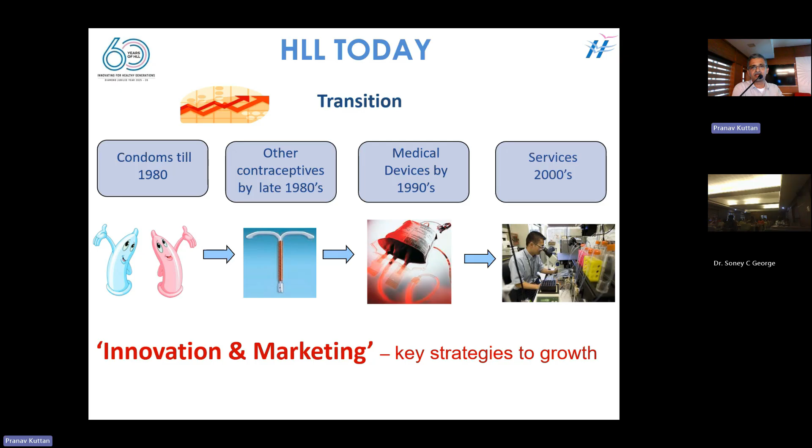As a business overview, we are into three different segments: contraceptives, pharma and FMCG. We produce condoms, intrauterine devices, oral contraceptive pills, hormonal pills, and personal hygiene products, which include sanitary napkins. Hospital products, which includes blood bags, surgical sutures, disinfectants, and rapid test kits for various infections. And healthcare services, we have the umbrella of Hind Labs, which is a pathology lab, seated in different parts of the country for providing testing of all parameters at affordable rates.

We also have Hind Labs imaging services in different hospitals, including medical colleges. In Kottayam Medical College also we have one. We provide MRI and CT services at affordable rates compared to the market. And Amrit Free Generic Pharmacy is the HLL brand under the ministry for providing pharmaceutical products and implants at affordable rates for the population.

So, in a nutshell, this is the range of products manufactured and marketed by HLL. These are some of the brand names: Moods, Velvet, Emily, Saheli, Novex, Happy Days, etc.

Let me come to talk today about latex technology, which we have been utilizing for production of condoms since the 60s. Initially, we got the technology for manufacturing condoms from latex from a company called Okamoto in Japan. We started as a factory for packing condoms, which was produced and imported from Japan, and later we started our own manufacturing using the technology.

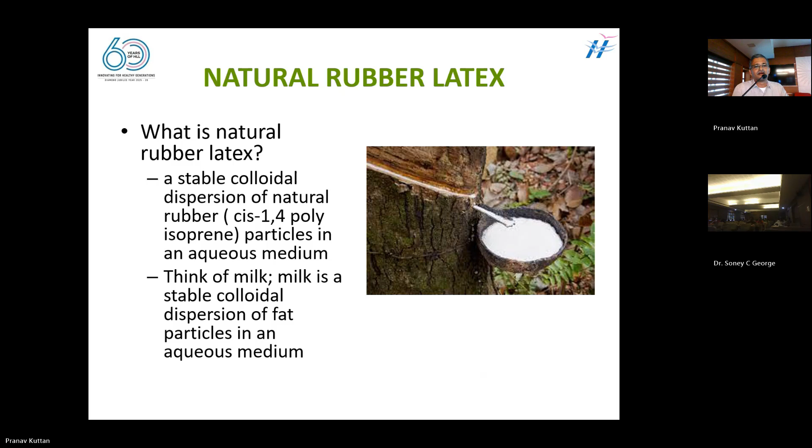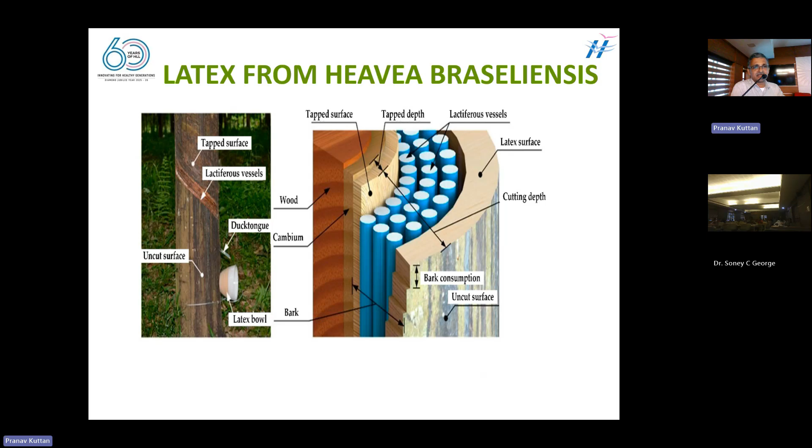So where does this latex come from? It is produced from a plant called the rubber tree, Hevea brasiliensis, which was initially brought from Brazil, also called para rubber. It came to Kerala through Ceylon and to the tropical countries. This is the juice of the plant, a weeping from the vessels, the lactiferous vessels. It is tapped at frequent intervals to obtain it from the tree as an aqueous colloidal solution, which is sticky in nature and has unique properties of elasticity.

So this consists of small spherical particles surrounded by a protective shell of proteins. It has a distribution of particle sizes, from small to big, typically around 1 micrometer. The size plays a very important role in its surface effects. And the chemical structure is shown here. This is the molecule isoprene, and this is joined together to form the rubber polyisoprene.

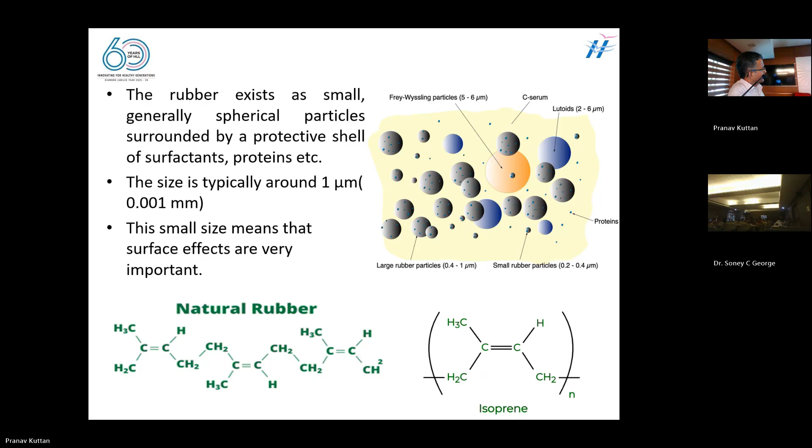So for comparison, in 1 teaspoonful of natural latex there is approximately 3 grams of rubber. You know that the total weight is much more than that; the remaining weight is water. At a particle diameter of 1 micrometer, this means it contains approximately 6 × 10¹² particles of rubber in the spoonful of latex. The total surface area of the particles is approximately 20 square meters.

So this small volume has a much bigger area. The smaller the size, the more the area. If it is stretched lengthwise, it would stretch over 6,000 kilometers. That is the length of the chain.

So how would a latex particle look? It's a spherical shape, as I told. It has a covering of protein over each particle. Inside the particle are the polyisoprene molecules, and there are other materials called phospholipids, which help the particle keep its shape and stability. It has a negative charge, and it is stabilized by the electrostatic repulsion of these particles.

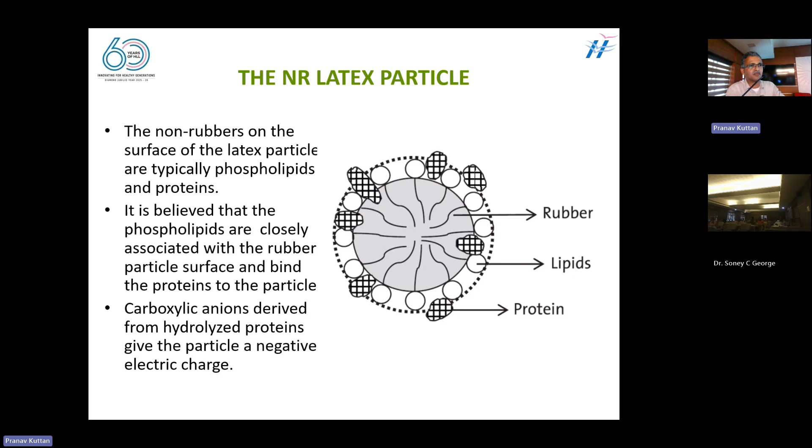So what is the structure telling us? The high molecular weight means that the chains in the small area will entangle as a network structure, like pasta noodles forming a chain entanglement structure. So it gives a measure of elasticity to the molecule. As you might have seen from your school days, these rubber bands are elastic.

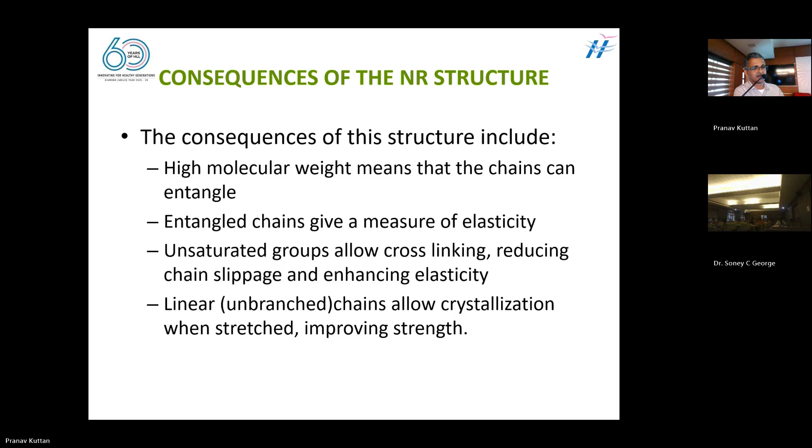The elasticity is given by a process called vulcanization, in which the chains are cross-linked using some molecules, especially sulfur. So when you use this latex, as I told, it contains rubber particles and much of it is water. Why does this latex need to be concentrated before use?

When you use this latex as such for a product, it is quite uneconomical because it contains only 30-35% rubber. The remaining 60+% is water and other particles, including proteins, carbohydrates, lipids, carotenoids, etc. So there are ways to concentrate this latex before using it to produce a particular material. These methods are not done in our household latex production; the latex is sent to a collection center where it is converted into a product.

So these methods are, one is centrifuging. You are all familiar with centrifuging. When you rotate the liquid at a higher speed, the solid particles will settle, and this can be used to separate the water from the isoprene molecules. Next one is creaming. You have seen creaming in household activities, for producing cake and all that. The cream contains the material we want, and the remaining things settle out. So creaming also can separate the rubber from the water.

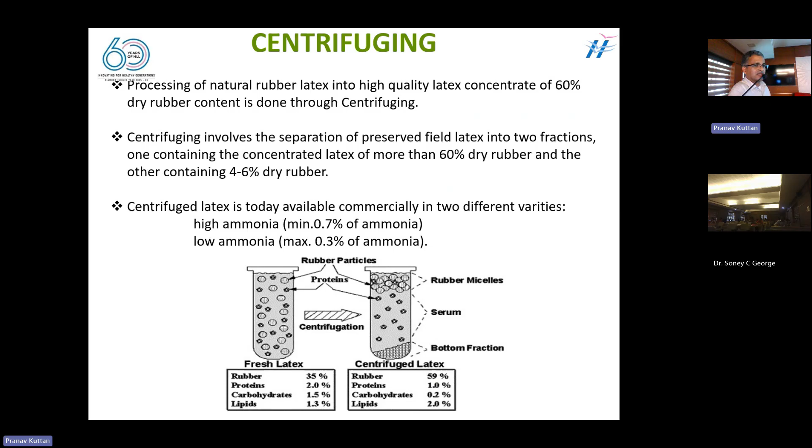The next process, as I told, is creaming. This is a simple process which is used in normal household activities or small scale industries, for rubber bands or small products, and is done using a creaming agent. This creaming agent is normally tamarind seed powder, which is used to separate the rubber latex from the water.

So the cream layer, which rises to the top, contains the major amount of latex, also around 60%, and the bottom level, the serum level, is considered as an effluent which can be removed from the mixture. Here, an extremely concentrated 60% may not be obtained. They may obtain 50% only, because this much concentration is required for products which are not so critical in terms of rubber, like rubber bands or finger cots or balloons, etc.

Now, coagulation. When you see the product from latex, you see a solid material. You are not seeing a liquid material. So these rubber particles are coagulated to form the dry rubber material. As I told, this protein membrane is covering the rubber particles. This membrane is negatively charged and they repel. When you add acid, these negative charges get neutralized, and then latex particles join together to coagulate. And by the action of bacteria also, this will happen. So when you keep the rubber for a long time, normally it will get coagulated without adding any acid.

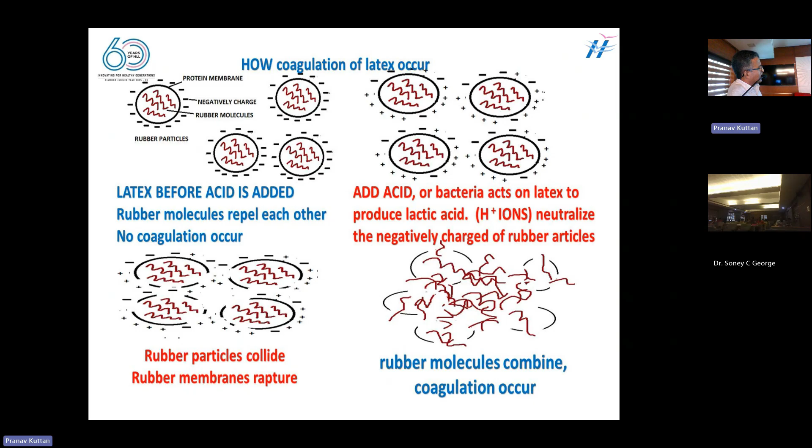So when you see the neutralized rubber particles, positive ions are there, which will neutralize the negative charge. It will break the membrane, and the particles will collide, and this will form an entangled structure, which is the rubber hydrocarbon. And this will be a stage called a pre-vulcanized stage, or a coagulated stage.

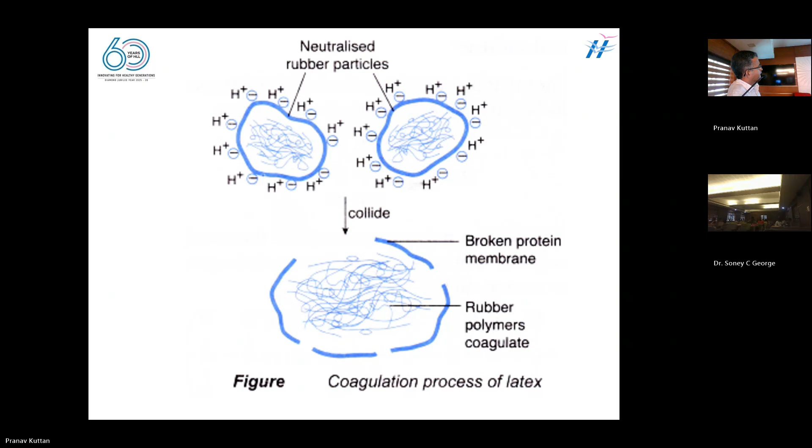So in the rubber latex, you have seen water is there, rubber hydrocarbon is there. There are other materials which are also responsible for giving stability to the latex. As I told, latex is a colloidal material. It is colloid particles dispersed in the water medium. So these colloids are stabilized without being coagulated or destabilized by the effect of other materials like proteins, carbohydrates, lipids, and enzymes, which have specific importance in giving properties to this latex.

Some support bacterial growth, increase volatile fatty acids, and decrease latex stability, and some are acting as fillers. Some are acting as components for increasing its modulus, increasing its strength. So all these properties are given by these additional non-rubber components.

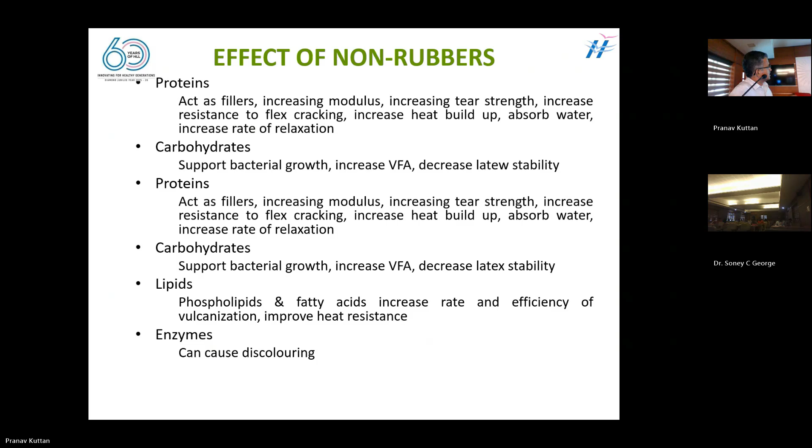So why can't we use this rubber as such, as we get it from the tree or after concentration? As you all know, when you see uncrosslinked rubber, or rubber obtained from the tree which has been coagulated, it will have elasticity, but it's not so stable. It will rupture, or it is not stable at high temperature. It will melt.

So in order to improve the properties, latex, or rubber, is subjected to a process called vulcanization. All of us studied this in our school classes. It is the addition of sulfur. The name comes from Vulcan, the god of fire. This is used to give linking between the hydrocarbons, which I have shown just now. These hydrocarbons, which are entangled in the rubber molecules, are cross-linked, held to each other with the help of sulfur atoms.

This process is called vulcanization, and it makes the rubber stiffer and more elastic. It helps to retain its elasticity. When you stretch a rubber band, you can see it coming back to its state because of this strengthening effect. So it's vulcanized rubber. When you have rubber gloves, you can stretch them, wear them on your hand, and they will retain their shape, because the elasticity is retained. That's the importance of vulcanization in using rubber for its end use applications.

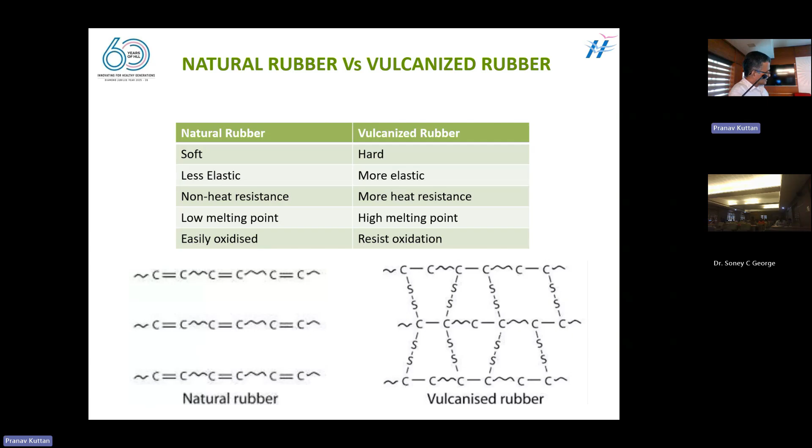So that's attacked. Oxidation happens easily, and it will break. It will not have the strength itself. So for imparting strength, this process is used in different industries. As I told, rubber has elasticity. It's an elastomer.

An elastomer can be made by linking together the polymer molecules to form a 3D network, having a network in each direction. The chemical bonds between the polymer molecules are called crosslinks. These are formed by sulfur, and sulfur cures the natural rubber. This is the process of vulcanization.

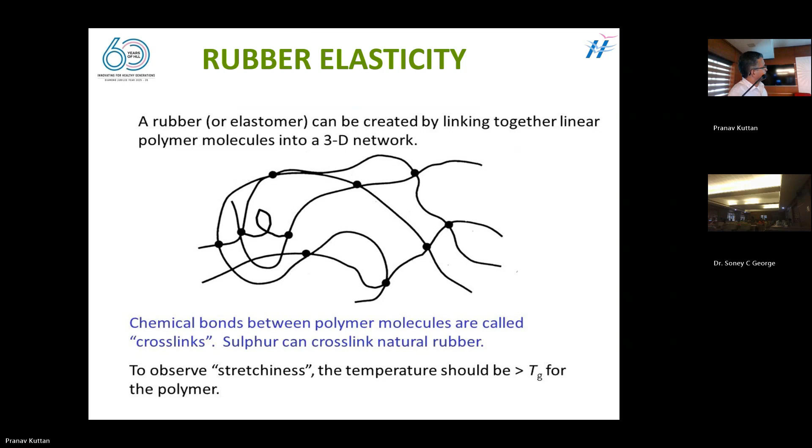So in order to do the compounding of latex, we use several agents to impart the properties. We have to add sulfur to make the cross links between the carbon chains. So for that we require sulfur. This is a major vulcanizing agent which is used for natural rubber latex.

Natural rubber latex can also be vulcanized without sulfur. They can be vulcanized by other processes called radiation or peroxide vulcanization. There are also other methods. But the common commercially used method for imparting elasticity and strengthening rubber is sulfur as the vulcanizing agent.

So when you use sulfur alone, this is going to happen over several days. When you mix sulfur and keep it in the vessel, it will take days to get the cross-links. When you heat it, it will also take hours for the cross-links to happen. So this is not commercially viable. To make it commercially viable, you want to speed it up. You have to cross-link it in minimum time, but obtaining maximum properties.

For this purpose, we use some other chemicals which can accelerate this process. These chemicals are called accelerators. These are chemicals having several functional groups, which are either sulfur donors or activators, which initiate the reaction of sulfur with the carbon.

So, as I told, these rubber products which we are using have to have a shelf life. When you use gloves, they have to stay on the shelf for a year or two. When you use a rubber tire, it has to stay on the shelf and also with the car or bus for a number of kilometers or years. So for this, it has to have an ageing resistant or ozone resistant property, which is imparted by adding other chemical agents called antioxidants.

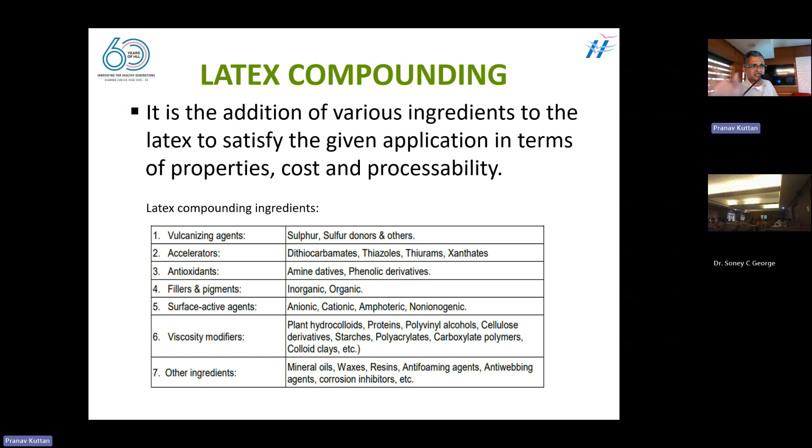So these are the properties of the materials which you are adding: vulcanizing agents, which introduce the three-dimensional network; accelerators, for speeding up the reaction; and antioxidants, which prevent oxidation. Fillers give colors. Surface active agents help the system work much better in the later stage. And viscosity modifiers keep the viscosity at a level which is good for the product to be formed.

So when we take this latex from the centrifuging plant to a manufacturing site for a rubber product, like latex gloves, condoms, finger caps, tissue expanders, or baby teats, anything, you want to have the optimum properties for the product to be formed. As I told, this is a polymer molecule having a particle size or variation of particle size in the latex, which gives specific properties to the final product.

So when it is kept in an idle state for a period of time, it undergoes a step called maturation. What happens in maturation is that the crosslinks get adjusted. The mono, di, or polysulfidic linkages get adjusted as we require for our products. We design the crosslinks to obtain the properties our products require. So we keep the latex for a maturation period, normally a few days.

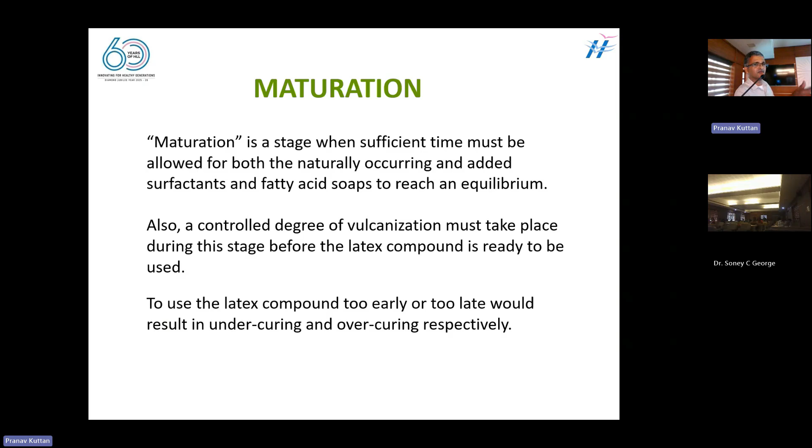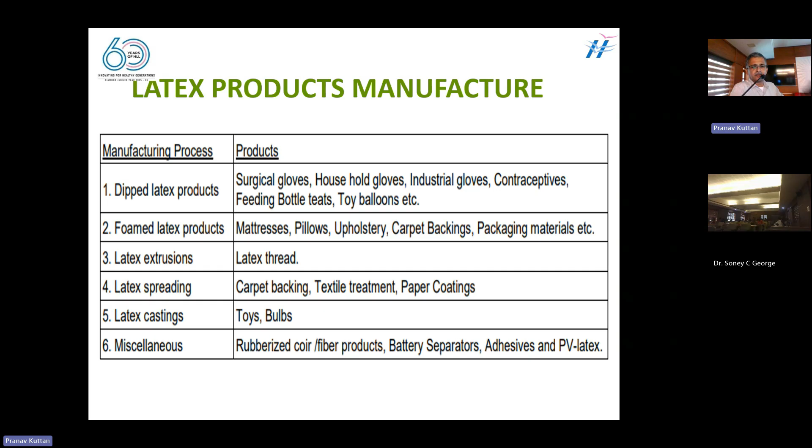So there are a lot of products made from latex which you might have come across in your daily life. These are dipped products, which include gloves, industrial gloves, contraceptives, feeding bottle teats, toy balloons. Foam latex products, the beds you use, the seats you sit on; latex extrusions, the latex threads which are used in our garments; latex spreading; carpet backing, which is used in households; coatings for paper; latex castings, certain toys and bulbs; and rubberized coir products, separators, adhesives, pads, etc. are also being used.

So, what are the processes by which you make use of this latex for making the products I have already mentioned? There are different methods by which this can be converted to a product. For example, when you get a jar of latex and want to convert it to a rubber band, how will you make it? You want to convert it into gloves, how will you make it? A flower? A bed? These are by different processes. So the products we see, the KSRTC seats you are sitting on, the beds you are lying on, or the rubber bands you are using, are all subjected to different processes converting this latex into that product.

So one of the processes is called dipping. It's a simple process: dipping of a mold into the latex, which will form the shape of that mold, and which is dried in an oven for some time for the process of vulcanization, and then you can use it after taking it from that. The simplest example is gloves. A glove mold made of porcelain or glass, you can put it into latex. When taken out, it forms a layer of latex over the mold. Then you can dry it in the oven at a specific temperature for a specific time, which can be predetermined.

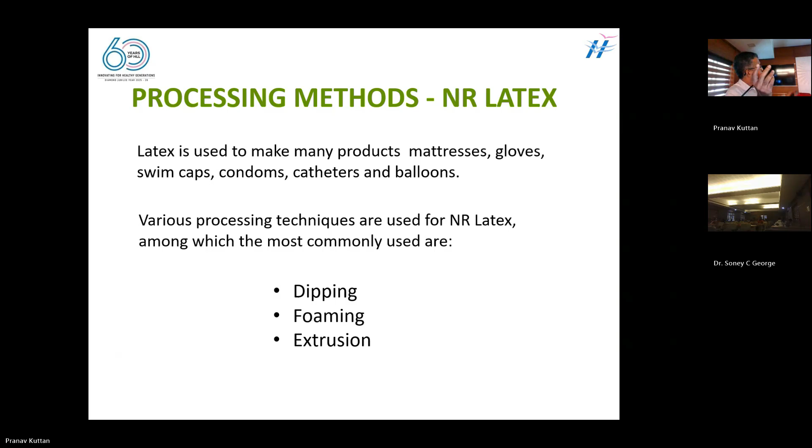These are the examples. As I told, dipping is the most widely used process for products made of latex. This is the balloon and the gloves: the former, which is a porcelain former, a wood former or a glass former, is inserted into the concentrated latex, which is mixed with ingredients like sulfur, antioxidants, acids, accelerators, etc. And of course, color. Then this is withdrawn from the latex and kept for drying in the oven at a specific temperature, maybe 70, 80 or 100 degrees Celsius, for a specific period of time, which will give the final product. And this can be taken out from the mold. The stripping is happening.

So when you dip, as I told, this is simple dipping for making balloons or gloves. There are different types of dipping depending upon the thickness or the type of material you require. For example, for baby teats, you want pure rubber because babies put them in their mouth. So you don't want any other chemicals there. So you use the most pure form of latex, having no color or a mild color, with no residual accelerators, residual antioxidants or residual chemicals, so as to prevent the baby from getting affected. There is no coagulant. I'll come to the first one.

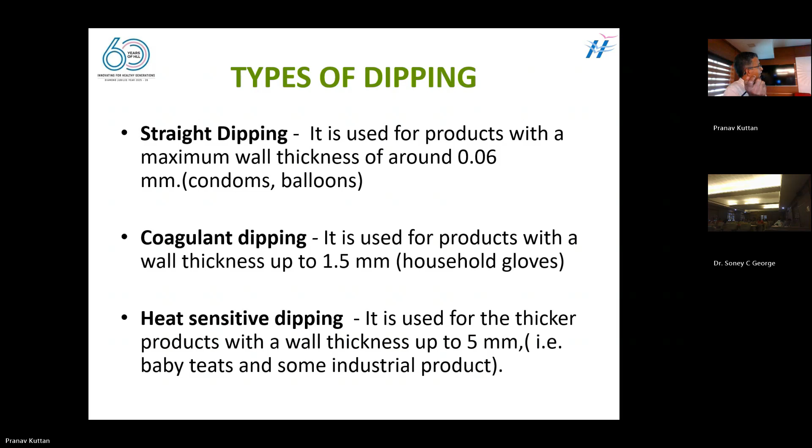The simple dipping method is used for making condoms. Condoms are contraceptive materials used by male and female. It's a barrier contraceptive used for preventing conception and also to prevent sexually transmitted infections. This is made by a simple, straight dipping process.

This is tested for production, freedom from pinholes, required bursting volume and bursting pressure, elasticity, strength, modulus, heat resistance, shelf life, etc. It can be made in different sizes, shapes, textures, and flavors as required.

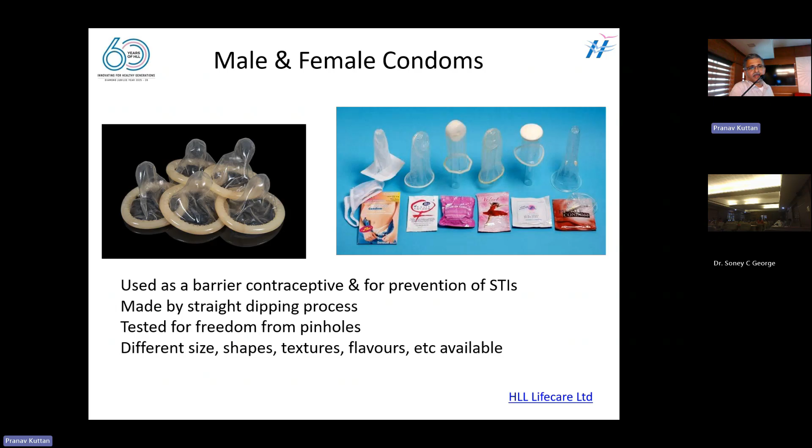The second product made using straight dipping is surgical gloves. Gloves are produced from different polymers, not only from latex. There are people who are allergic to latex, so they use latex-free gloves made of polyvinyl, nitrile, or other polyurethane materials. So different types are available.

These are made using latex by dipping porcelain molds. The porcelain mold is dipped in the latex for a particular time, then taken out and dried. It is dipped again in the latex to get sufficient thickness for the material.

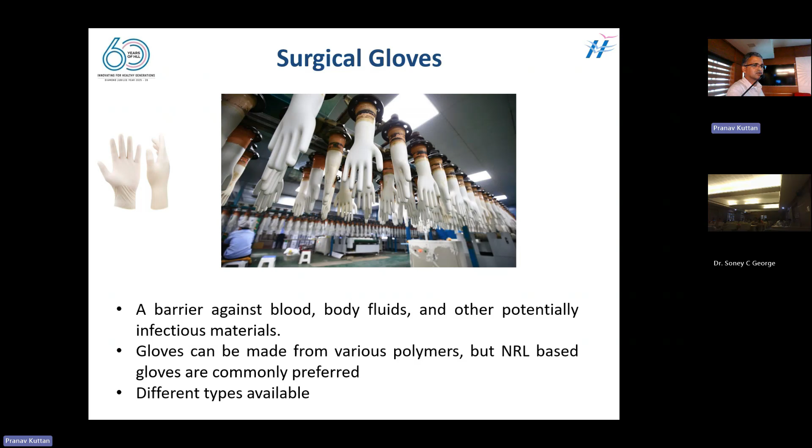Another product you come across in hospitals is the urinary catheter, also known as Foley's catheter, which is an indwelling catheter used when you're in a surgical situation or hospital stay and cannot go out or urinate yourself. The doctors insert this into your urinary bladder to drain the urine once it is formed, without the patient going out for urination.

This is used for a couple of days or weeks, as long as the patient is in the bed. This is the Foley's catheter, and it has a balloon. This portion is inserted into the urine bladder, while the balloon ensures the urine is drained off outside. These are called indwelling catheters.

Then there are external catheters, called condom catheters, worn by male patients who are bedridden, including old patients who cannot go outside frequently without help to the urinals, and they use this material. These are all intermittent catheters, short catheters which can be used by the patients.

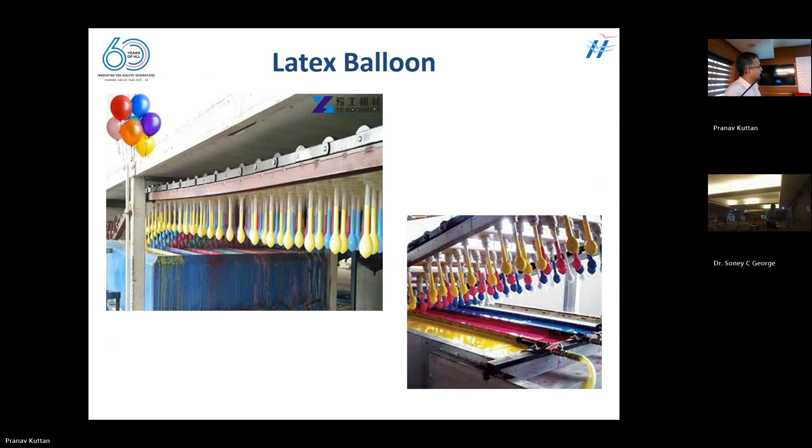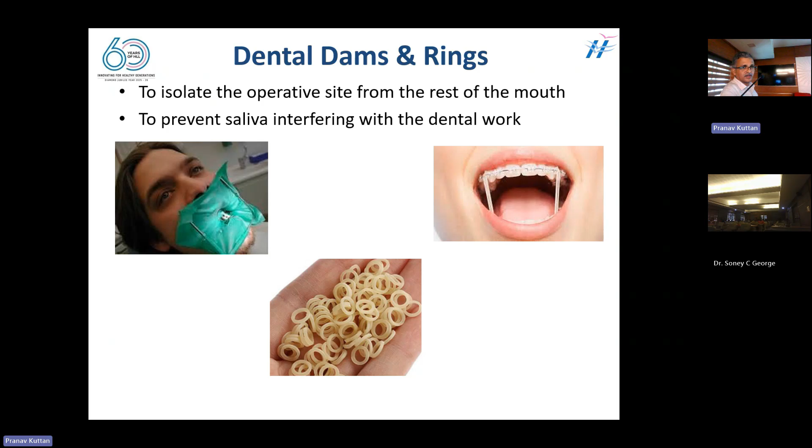So these are after the dipping process. The next one is the foaming. The foaming of latex is done for making cushioned materials like beds or pillows, made from latex using some foaming agents which can generate bubbles, allowing air to escape so the foam can be formed, then a gelling agent for gelling the material, and then a curing agent to cure it in the oven.

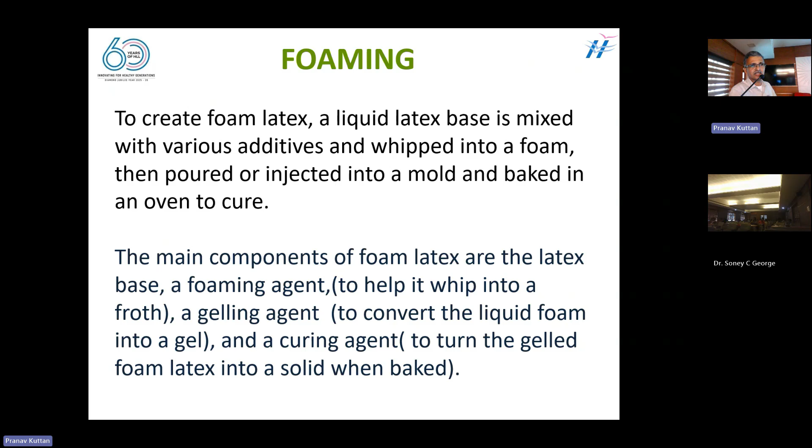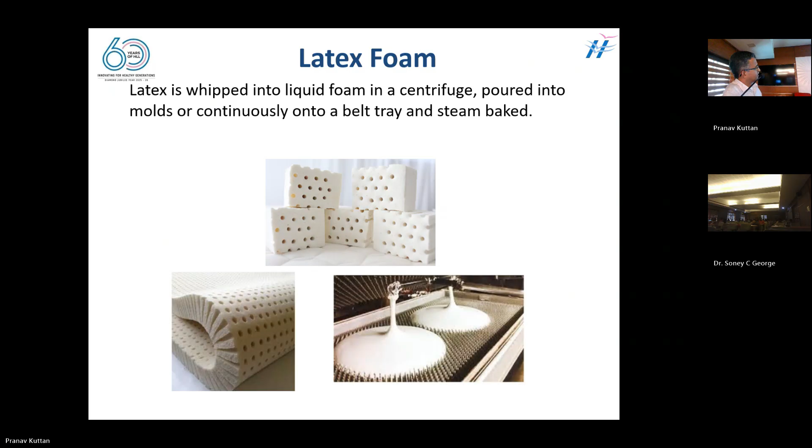Some latex pillows and then latex adhesives. Latex can be used for making adhesives for fixing tiles, resins, and other areas where it is industrially required.

Extrusion of latex, as I told, is used in thread formation, thread manufacturing. We have a big thread manufacturer in the world, which is in Palakkad. They are exporting a lot of thread made using natural rubber latex into various fabric industries in and around the world.

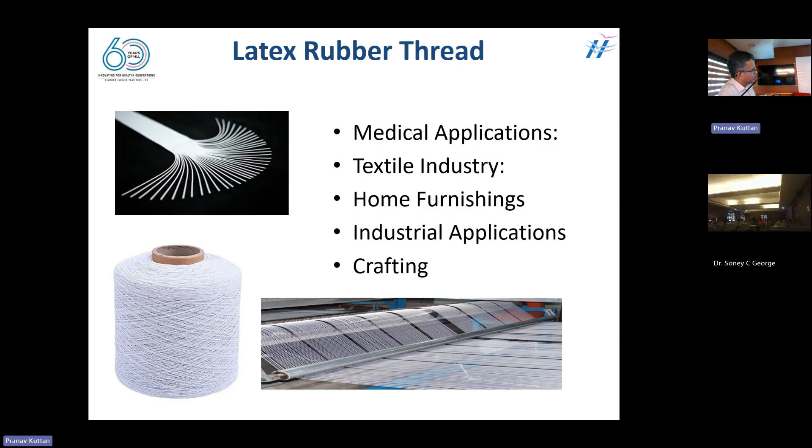Latex tubing - when you go to a hospital, you might have seen a lot of tubes being used for different purposes, including the tying of your hand, your IV fluids, or other communication mechanisms between equipment. These are all usages of rubber tubing.

These tubings are used for vacuums in vacuum apparatus in hospitals or in the dental area, or for medical purposes in hospitals. Normally latex has a tackiness, so when you use it in the body there will be some tackiness. Sometimes it is given a coating of material like silicone rubber or other polymeric materials to give smoothness and prevent the tackiness of the material.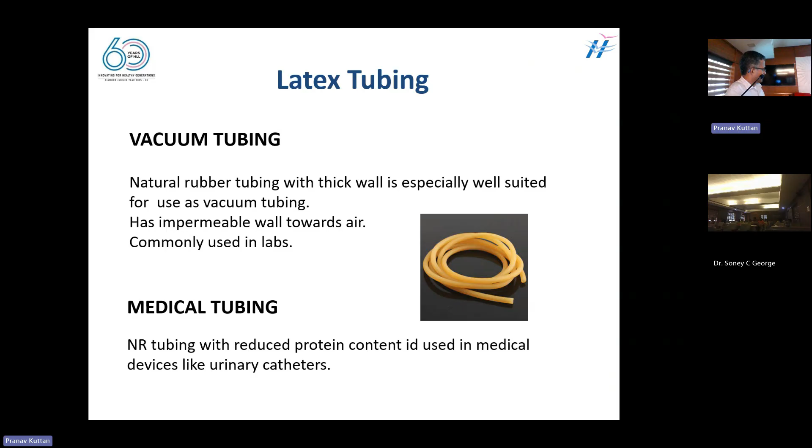Several other products are also made from latex. This includes beautiful flowers made using latex, rubber stoppers, balls, different structures, teaching materials, etc.

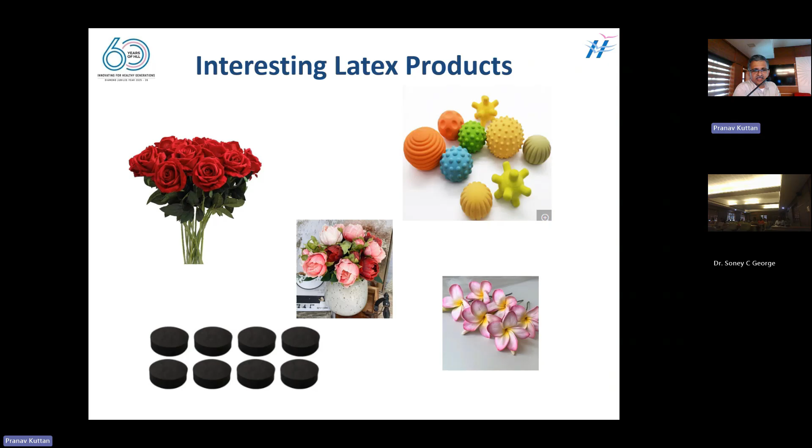So in HLL we have come across different products made of latex. As I told, the first one we started is the male condoms, which started in '66 using technology from Japan. We are also into manufacturing female condoms, with technology developed by ourselves, and this is being procured by international agencies as a female-initiated contraceptive.

We have a manufacturing facility in Kerala. The next thing is another specialty variety of condom, which has no smell of latex, high heat sensitivity, and higher strength, made by incorporating graphene into the latex.

Another product invented or innovated in our lab is the cervical spacer. This is a new device used for radiation attenuation purposes in clinical radiation centers. It is used in a process called brachytherapy.

There are two therapies where you give radiation to the body: teletherapy and brachytherapy. Teletherapy is when you aim a radiation source at the body part from outside at a distance, so as to give radiation to the affected area to destroy the cells. Brachytherapy is another therapy where the same radiation is given by permitting the source to go inside the body to the site and then destroy the cancerous cells there.

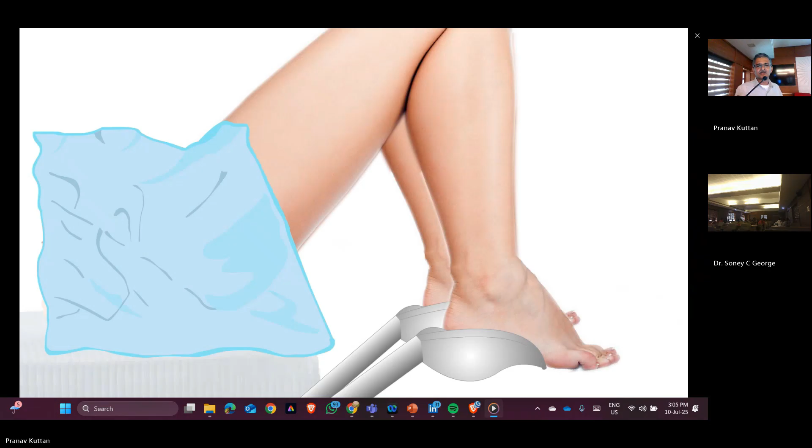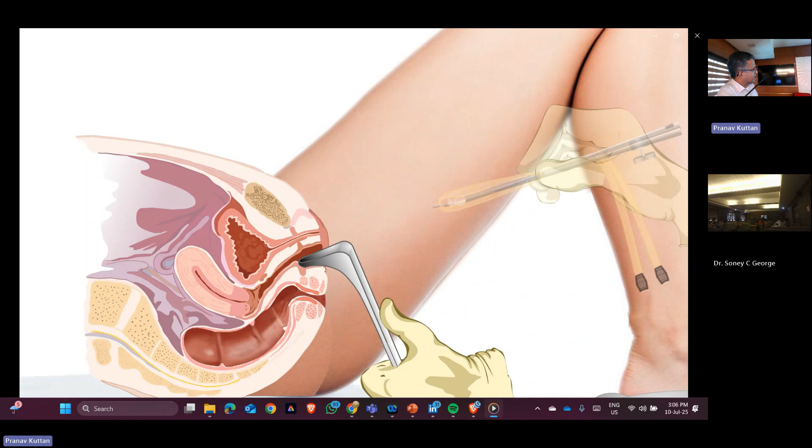So this is a pictorial representation of what is happening, how it is being used. You can see the uterus, the rectum, and the bladder. So when you give the radiation to this cervical area using the applicator, these two organs will get affected. So the purpose is to keep the critical organs away from the affected area.

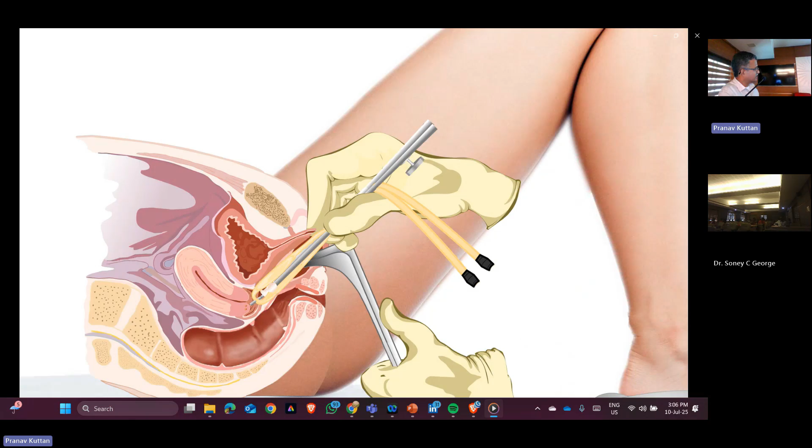So how can we do this? We designed these two balloons joined together. In between, the source can go, and these balloons can be inflated from outside using a source of air. This will separate the bladder and the rectum away from the source. Once the treatment is over, you can deflate both balloons, and this can be taken out along with the applicator. Clinically, it has been proved that we are able to reduce 25% of radiation fall on the bladder and rectum. This trial was done in PGI Chandigarh.

I can show you one more. Can you show one more video? One more video. There.

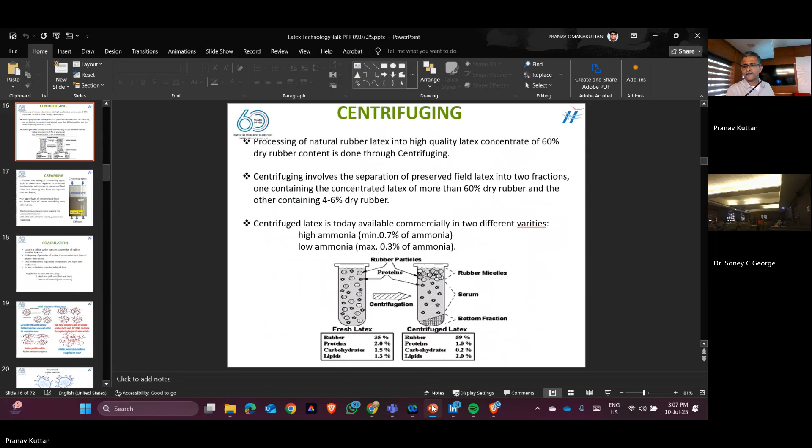So I can show you the manufacturing of condoms also. This is for those who haven't seen a manufacturing facility where the latex product is being formed.

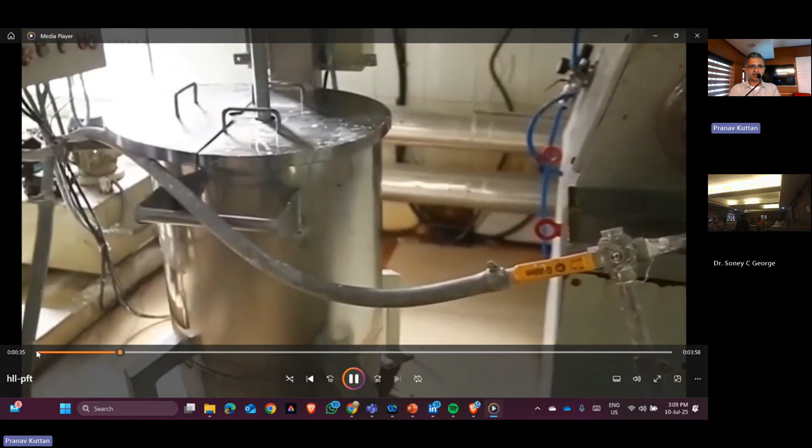As I told you, we use natural rubber latex, centrifuged 60% latex, obtained from different centrifuging factories and pumped in. We initially test the latex for quality, whether it is having the required total solids, required viscosity, required DRC, required ammonia content, and required zinc oxide content. All these contents are measured so as to make our production process trouble-free.

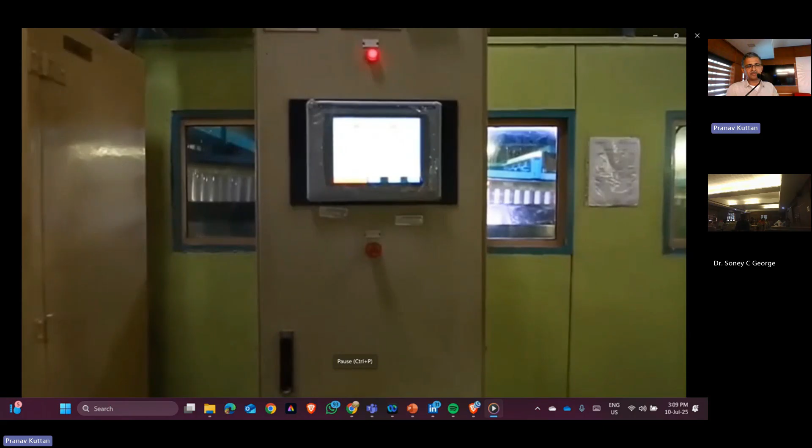Once it is confirmed that it meets the required qualities, this is compounded using sulfur and other ingredients. Then it is pre-vulcanized and matured, and then sent for the dipping process.

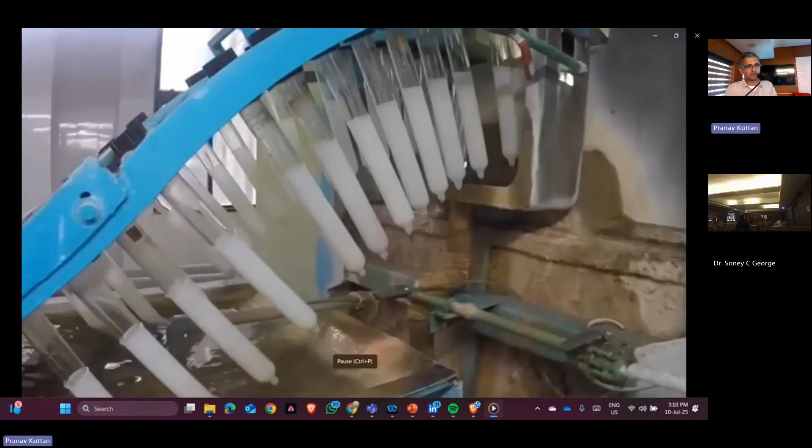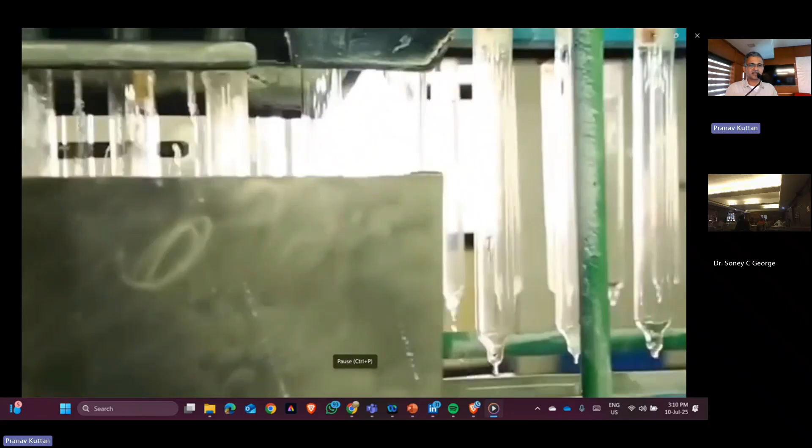Once the dipping is over, it is being formed into the mold as a thin film, and then it is passed through the anti-sticking solution, and it is stripped using a silica slurry, where it is taken to another place where it is kept in the oven for a high temperature around 80 degrees Celsius for a period of 1 hour or 45 minutes. And the molds are getting cleaned, washed, and then going for re-dipping in the dipping lines.

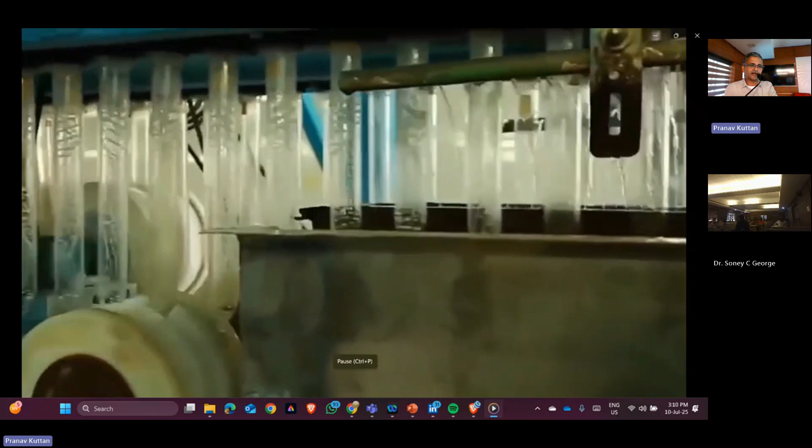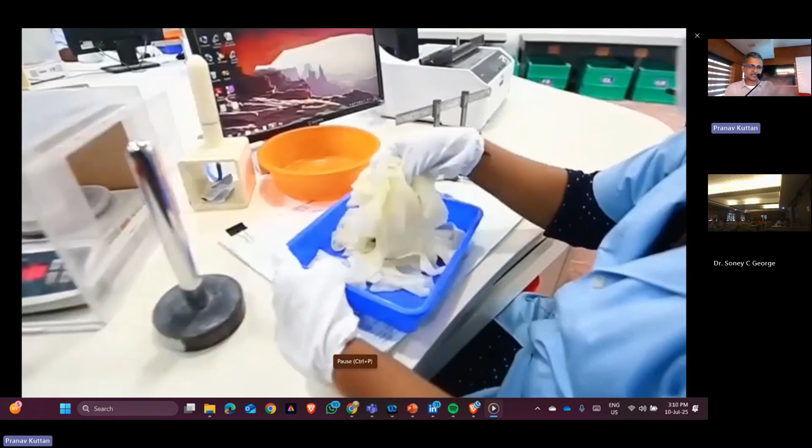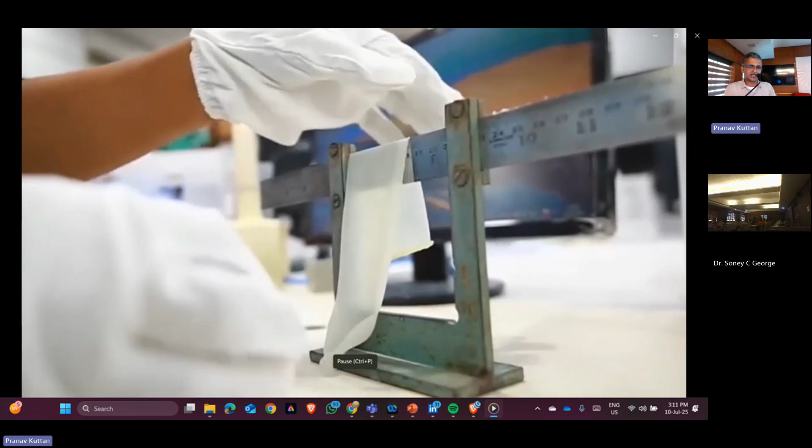So this is rinsing, water washing, hot water washing, soap solution washing, and then it's going for the drying. Here the stripped condoms are dehydrated from the slurry, and then they are taken to the vulcanizing chamber or a washing machine dryer, where it is dried and then heated, and then it's tested for the quality parameters, the half product testing, whether it's having any production issues, and then the length and the dimensions are being measured, and then it is going for the electronic pinhole testing.

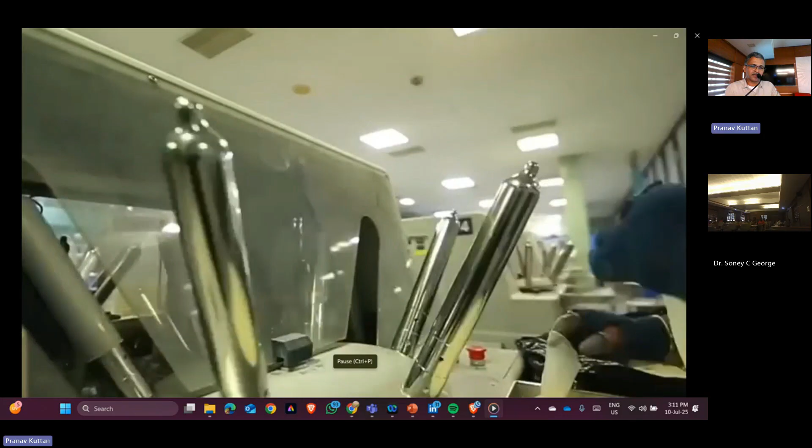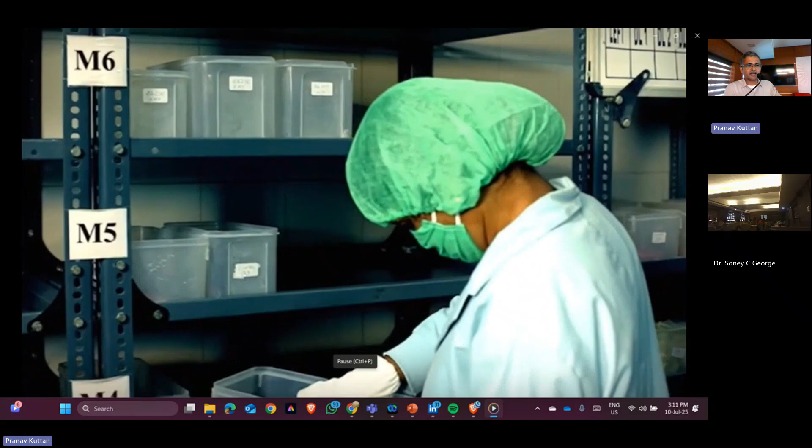100% testing is done, where this is being tested using electric current of specific voltage and ambient, and then this is being rolled, and this is being taken into the packing division where it is packed in a single, using silicon oil as the lubricant in aluminum foil, and then this is being secondary packed in boxes, and it is going for the dispatch. And before this process, the 100% testing is happening, and the separation of the rejection condoms is happening. So it is ensured that no condom is going outside with a pinhole.

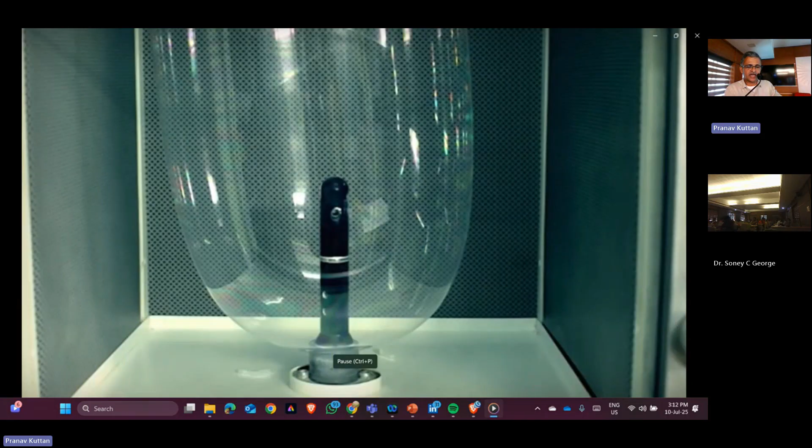And this is the bursting pressure testing. This is a complete test for measuring the strength and the elasticity or the elongation of the condoms. So this has to pass the WHO standards, whereas it is having a specific elongation and a specific strength. This is also being measured in the quality control department. These are the different processes of handling the material for testing and for packing.

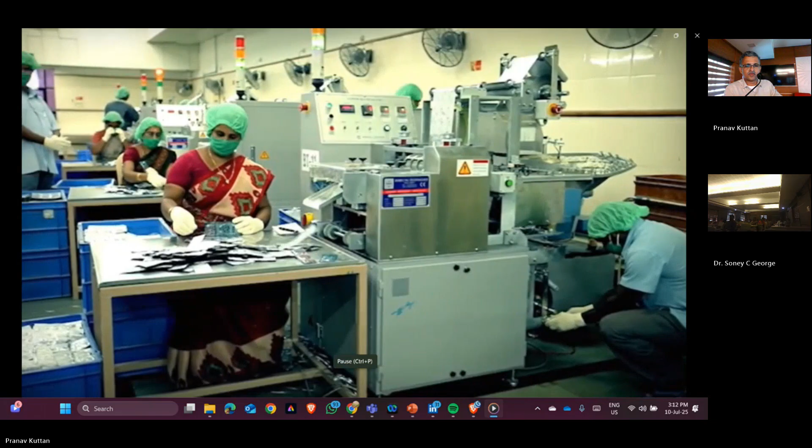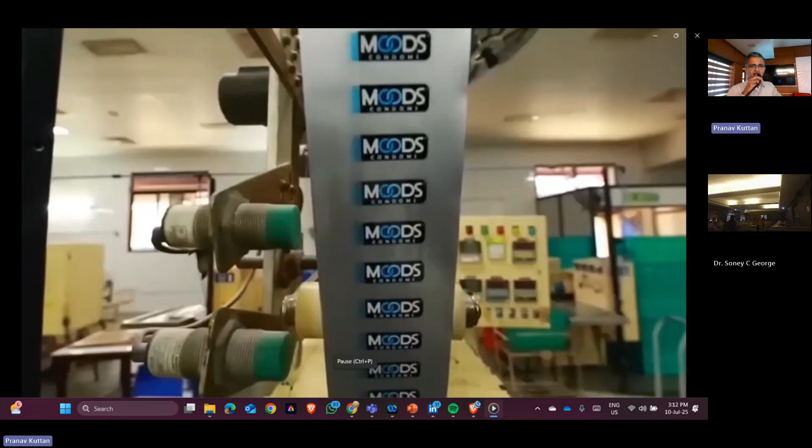This is the packing process. This single wallet packing is happening, where they are using silicon oil as the lubricant, which is going inside the sachets. And once it is filled, the required volume, around 400 milligram, is filled. It is going into these sachets and going into the single packing. And then this pack, as per the schemes, as per the volumes, as per the requirements, is being packed into the different boxes by the manual process.

And there are different schemes for different countries, different schemes for different national planning programs, and different schemes for open market, different for the UNFPA procurement for different countries like Kenya, Tanzania, South Africa, Ethiopia, Brazil, Peru, and all. So we are one of the major manufacturers of condoms in the world, and we cater to around 45 different countries.

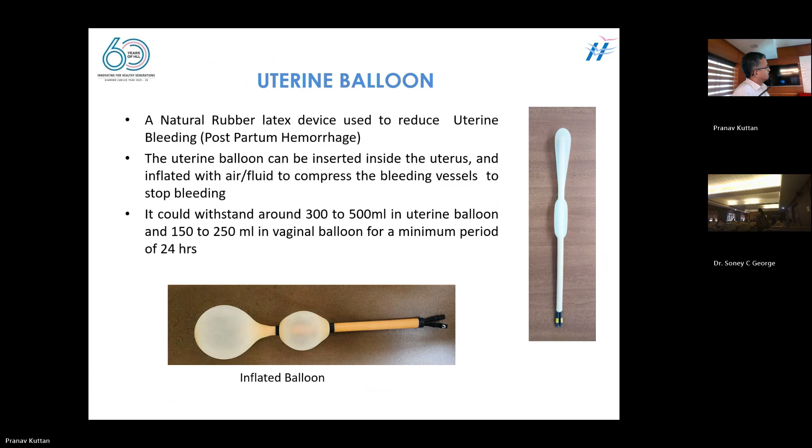Initially, it was okay. As time goes on, the number of diapers and the environmental damage, or the issue of disposing of them, became a headache to him and to the entire community. He once called our CMD and requested: you are a public sector undertaking manufacturing condoms and all that, why can't you design a device which can help old patients who have incontinence, who are unable to go to the urinals and pass urine, especially at night? So this came to us as a social need.

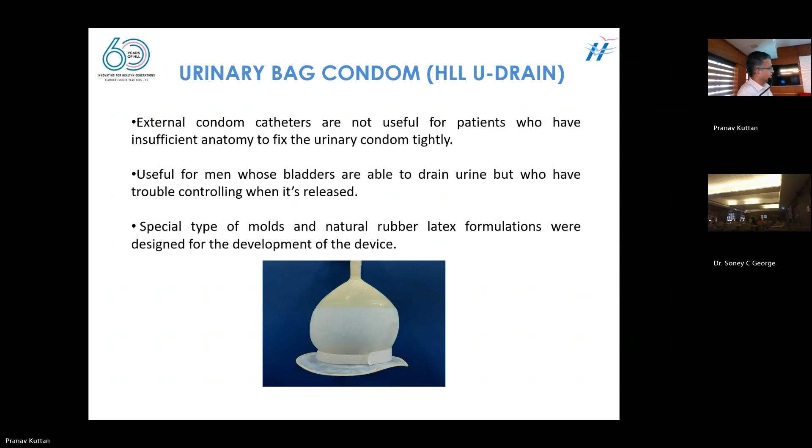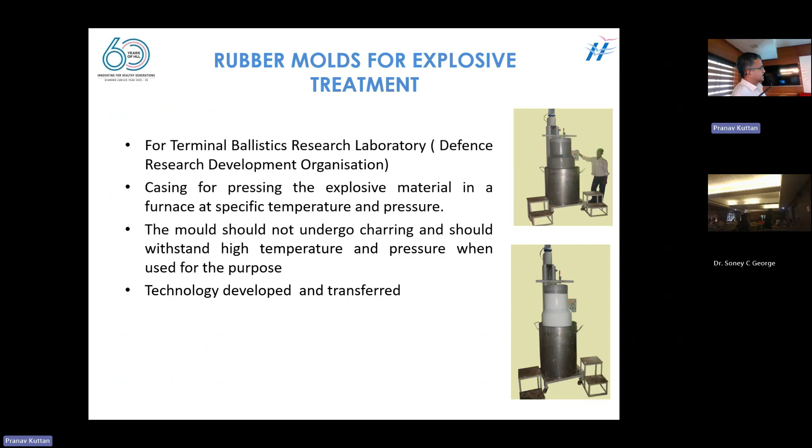These warheads are being used in the big guns, artilleries. So these warheads are being compressed at high temperature and pressure. They want a non-conducting material which can resist the temperature and high pressure at around 100 atmospheres. So this technology was developed by us and transferred to the DRDO.

So these are the products which are made by our HLL R&D, and we are also now into the development of new devices, either latex or non-latex healthcare applications, which are meant primarily for contraception and also for other treatment requirements.

Coming to the use of artificial intelligence in our area, you might all be knowing this technology. It is not just a single technology; it's rather a collection of techniques and approaches to allow computers to mimic human intelligence. We are hearing this is being used around the world for different applications. We are receiving all these WhatsApp messages and videos made by AI, which are fake or maybe real.

So this can be used in rubber technology also, in different areas, to optimize the technologies, to improve the product quality and to enhance the performance. This is not only automation of the manufacturing process, but it can also predict the maintenance, predict the requirements, and predict the product properties required for the intended usage. It can also understand the complex structures of the molds or predict the characteristics throughout the lifespan it is going to be exposed to.

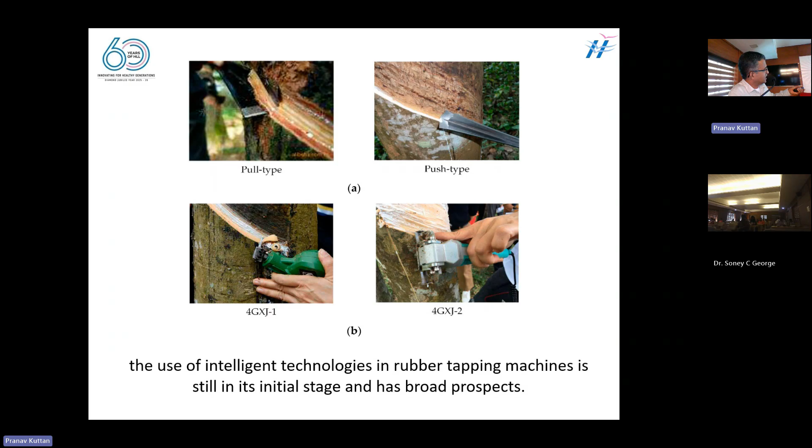or robot activities. So by using cameras and intelligent systems for measuring the required force to be applied, the angle to be taken, and the areas to be cut. These are all measured using different sensing mechanisms, according to the trees, for different bark lengths and different angles of cut, increasing the efficiency to around maximum, maybe say 80% and above, by using these robots. These are other applications of AI robots in the tapping of trees.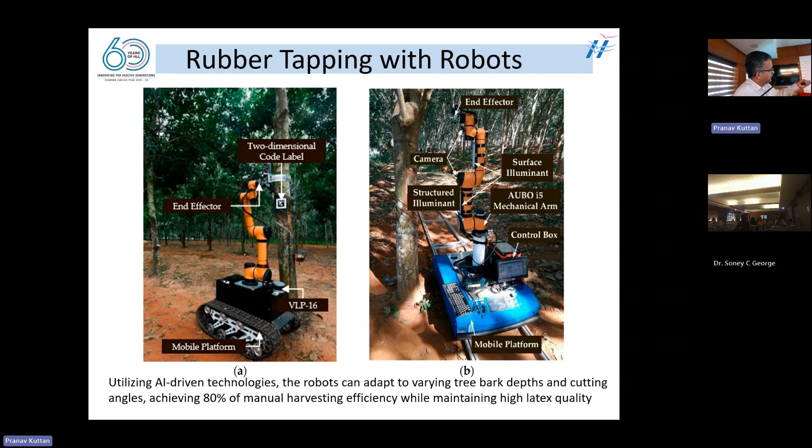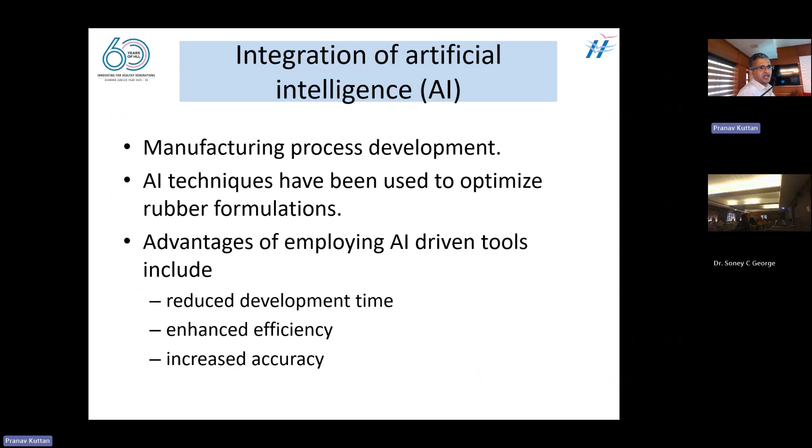Apart from this, where manufacturing is concerned, the process being used may not be the correct one or may not be the optimum one required in this particular area. So this can be calculated based on the data given to the systems and techniques, and different tools can be used to reduce the development time and increase the efficiency and accuracy of the particular process.

So where rubber is concerned, there is the integration of biotechnology with artificial intelligence to improve microbial rubber modifications, whereby growth factors, biological factors like pH, temperature, proteins and other related things, are carefully manipulated for the production methods. So in order to make it efficient, stable, adaptable and sustainable, these AI techniques can be used. This AI coupled with biotechnology can predict the required process or conditions for better, optimum production results.

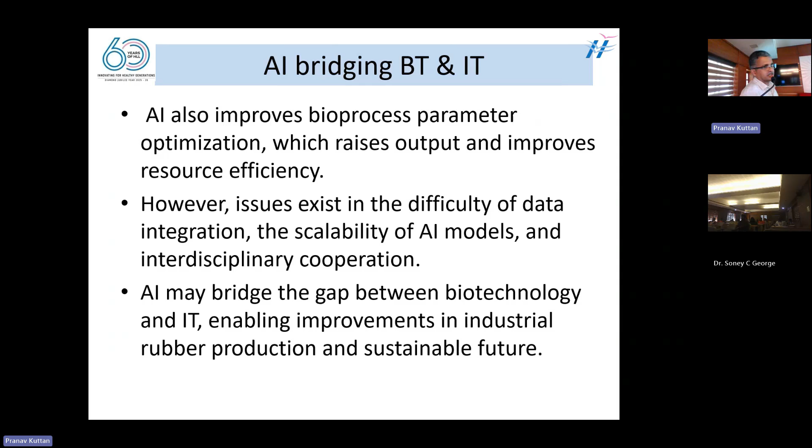So AI can bridge biotechnology and information technology for improving the bioprocess parameters. As I told, the pH, temperature, and biotic factors all contribute to the bioprocess parameters, which are responsible for the yields of rubber production, and both IT and biotechnology can be utilized in sync to enable improvements in production for future activities.

So the utilization of AI-driven solutions can manipulate the formulations required for getting optimal results for these parameters.

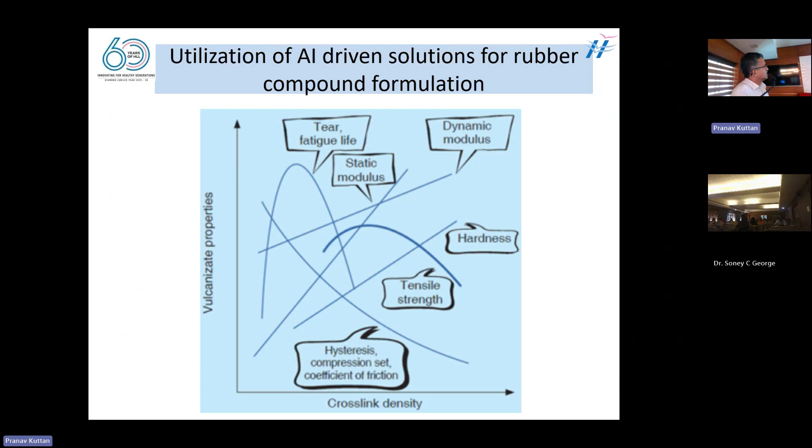So these are examples of tyre production where they are using ANN structures, artificial neural network structures. Like in our brain, we are capable of understanding situations based on our previous experiences. For example, you have an experience of touching a hot material, and then you pull your hand. This is based on experience because you know that it will hurt you. So based on this type of experience, this artificial neural network can predict the final properties or final effect based on the inputs and the data gathered. This is being used in tyre analysis on real world data of raw materials.

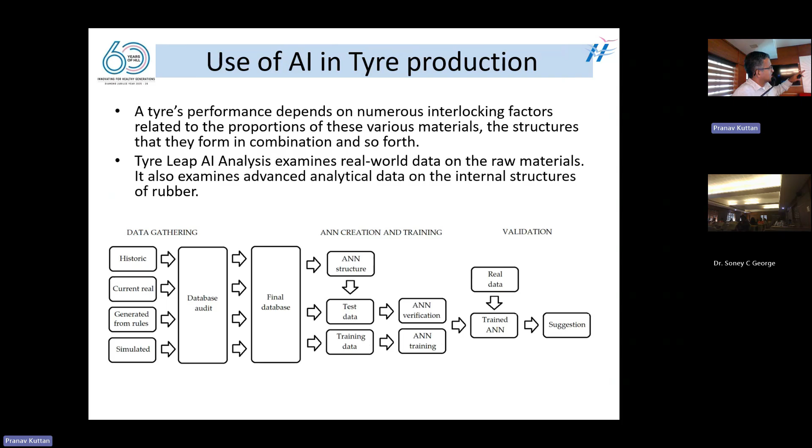So after getting data using AI, these properties of rubber and tires can be predicted from the scanning information collected. What are the raw materials used in the compound? How is it going to finally affect your properties? What are the structural changes required? What are the modifications required? All those can be manipulated.

Another thing which has been recently published is the tanglemer, a novel word. As I told, there is the three-dimensional network formed by the cross-linking structure. Apart from these cross-links, there are entanglements of the polymer chains in the polymer network, which determine the final properties.

These entanglements are called tanglemers, which resemble noodles, the pasta structure. Using this tanglemer technology, they are able to use a low-intensity latex processing method that can preserve the long polymer chains. The latex polymer chains are preserved, and the strength is preserved by the entanglements.

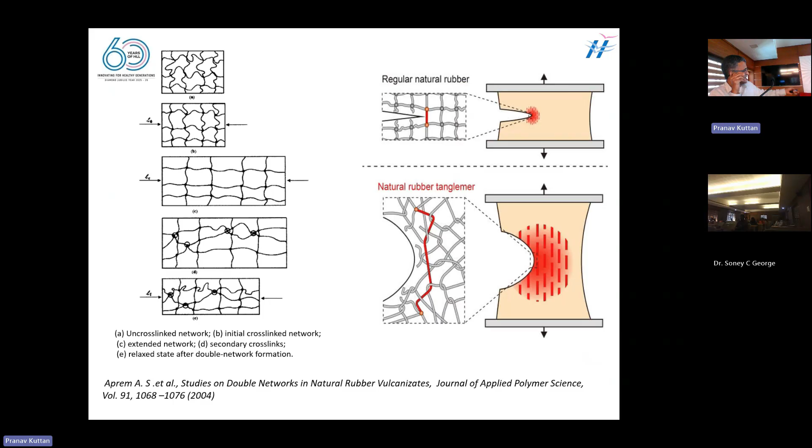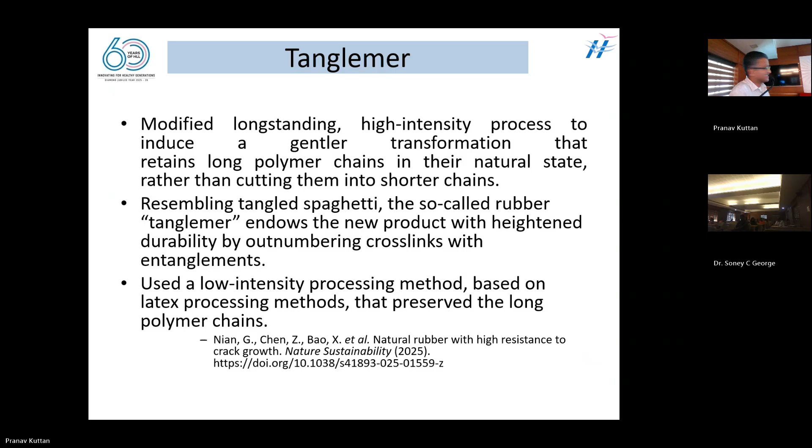Yes, exactly. Yeah, physical crosslink density. It was mentioned, but as I told, this is just now coming again. You see, this is a 2025 publication. The entanglements were there; they added a nomenclature, tanglemers. So things are being put in a different way. That is innovation, no? Seeing things, doing things in a different way.

So, an overview of processing based on the available publications: AI is supposed to transform the traditional industrial process altogether, covering production management, quality assurance, and process control. Right now people are using it in logistics, to predict the requirements of a product at a particular time or region, enabling real-time monitoring and data-driven decisions.

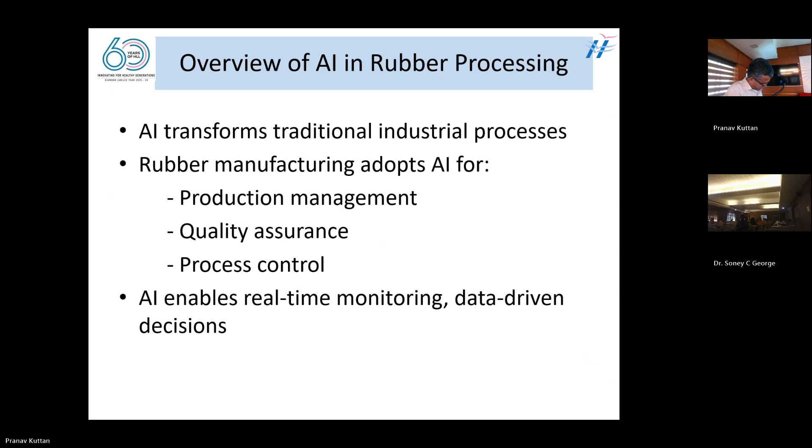Several authors have found a lot of applications in optimizing manufacturing in the rubber sector, such as optimization of compounding, where right now we are using a copycat of the textbooks. There are possibilities of further optimizing formulations by adjustments based on AI data. Then intelligent shaping and automation of defect detection based on data on defects detected in the past; there is a lot of scope for intelligent shaping.

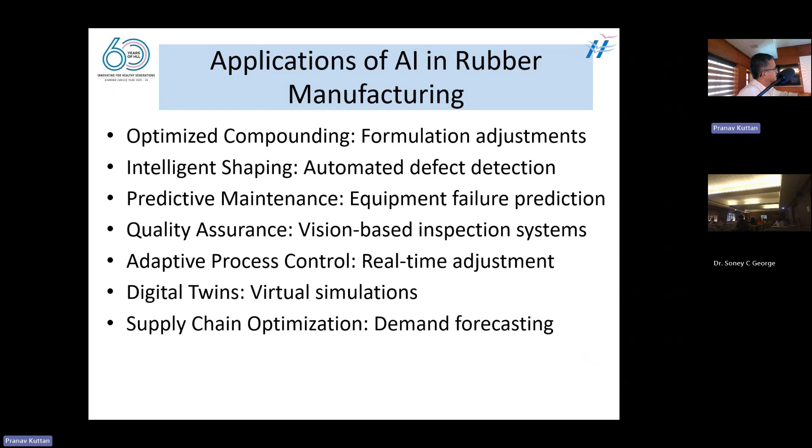So then other things are the digital twins for virtual simulations and supply chain optimization, which is being currently used by a lot of people in the sector. So future perspectives, which are all dream things: AI-driven smart factories will be in the future. Collaborative robotics, sustainable manufacturing with AI, as I just now said. Then human AI collaborations, the brain and the artificial things collaborating more. And AI-enhanced innovation and product design, as we just mentioned that all things were innovated by seeing it differently.

So as a conclusion, let me say that the integration of AI in rubber product manufacturing is going to be a game changer, because all the existing things are going to be changed, because data-driven insight is applied to the systems, which can generate a lot of new ideas, new forecasts for new areas and new behaviors. And by enhancing the machinery with AI, we can be smarter and more efficient in the manufacturing processes.

And it will enable predictive maintenance. Maintenance is now being done after the issue is detected, and the preventive maintenance can be done much earlier based on the predictions by AI data. And it may be exciting to see how AI will continue to transform the industries in rubber manufacturing for the future, based on the updation of AI and the technology which is coming out.